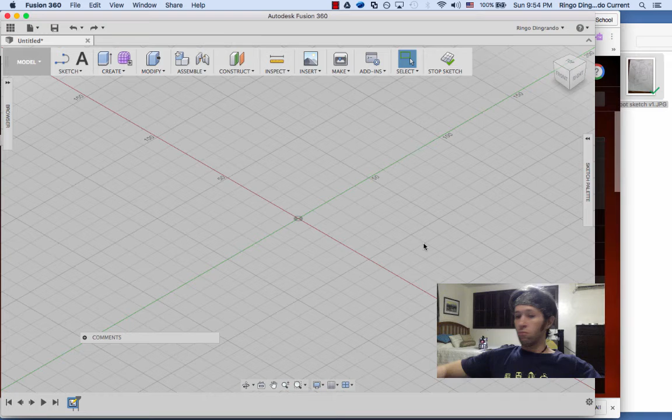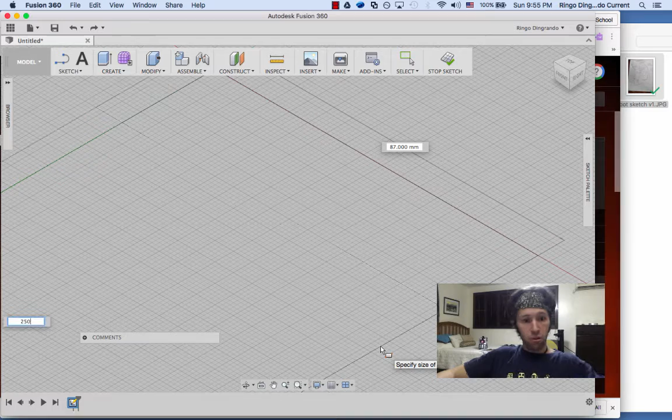Now if you are making the housing joint stool, I think it's easier to design this one upside down. So I'm going to put the top of the stool on bottom. So I'm going to hit R and draw on the bottom horizontal plane, and I'm going to zoom out actually, and I'm going to make it 250 mil by 350 mil. Return. I'm going to zoom out more, drag this into the middle.

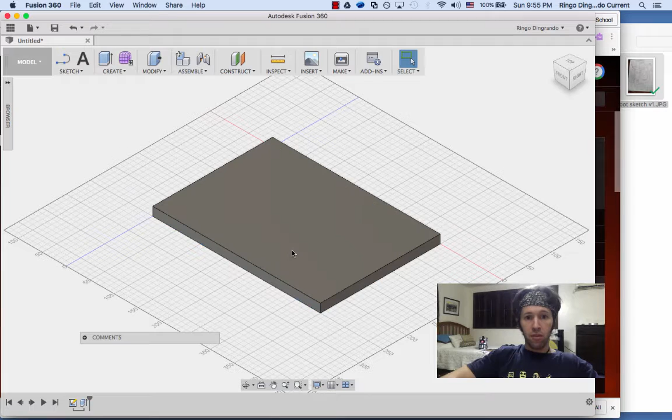I'm going to hit Q for pressing and pulling. I'm going to select that and make that 18 mil. So I'm going to use 18 mil birch plywood. And that's the bottom of my stool. That's actually the top of your stool. Yours should be way more interesting. I'm just going to leave it as a rectangle for simplicity.

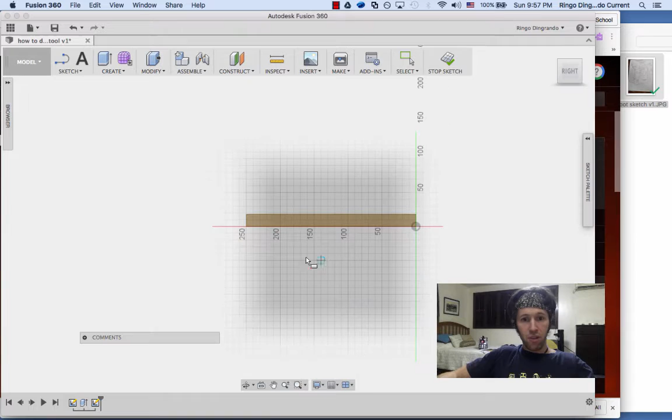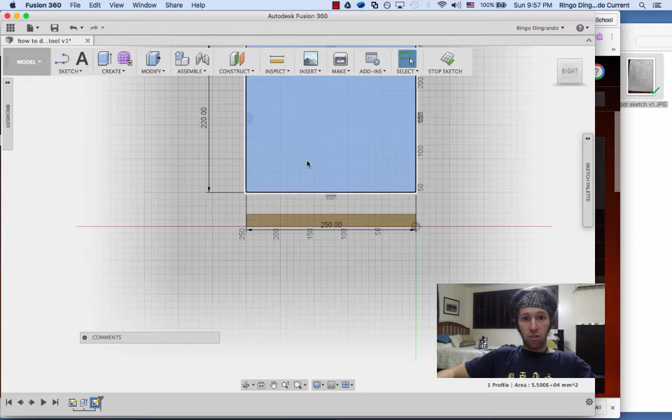Now the next thing is we want to draw one of the legs. So I'm going to make another R for rectangle. I'm going to draw it based off of this face. I'm not going to connect it to it though. I'm going to draw it starting here, and I'm going to give it a height of maybe 220. And a width, I'll tab over to 250. And hit return. And I want to make this depth of 18. So I hit Q and 18 and that.

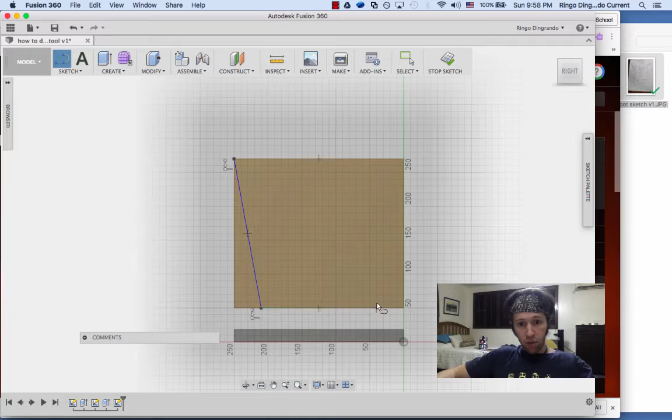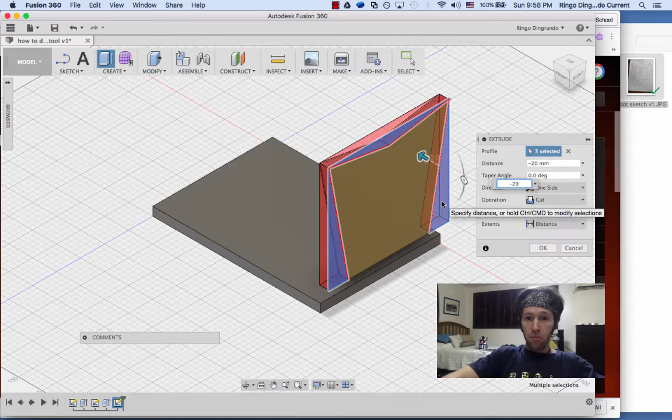Now I want to give it a shape. I'm going to go a very basic shape. Yours should be more interesting. I'm going to click that. I'm going to hit L for line, and I'm going to take that down to there. Take another line to there. I'll cut into the middle a little bit, and I'll make those. And I'm going to use Q to push those sections out all at once, and I can put in, let's say, negative 20, and that pushes them out.

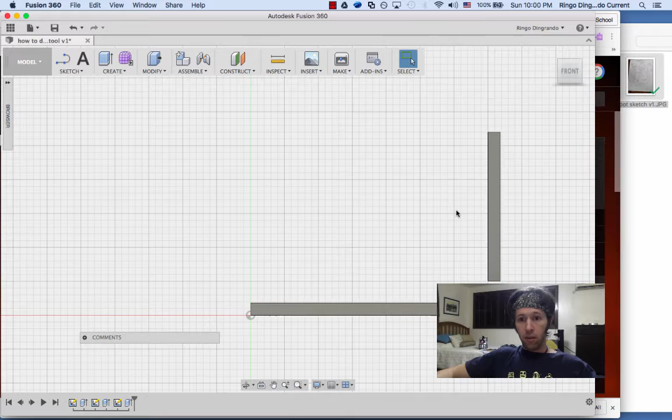Got one leg, I want to make two legs. So I want to look just at this right side and drag this down. Maybe I'll look at, this is probably better. And I'm going to highlight just this part, and I'm going to copy. Then I can right click and I can paste. And now it looks like there's not a second one, but there is. It's just right on top of it. So I can move this second one by sliding the arrows.

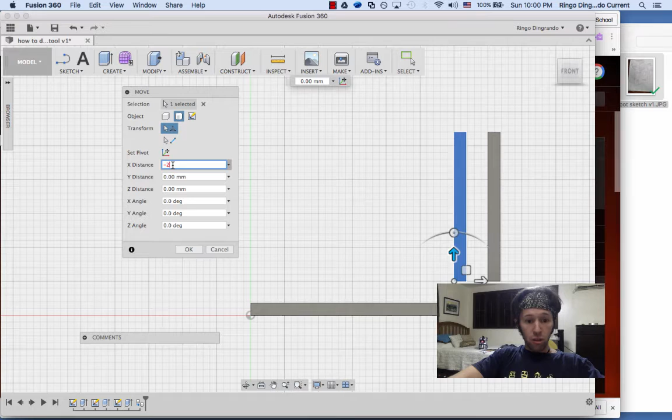It's maybe best to just put in the distance. Let's say I want to make it go minus 50. And that is the right way, but I want it to go more than 50. I want it to go maybe minus 250. And that moves all the way over there. So I'm going to spend some time getting these put in exactly the positions I want based on changing these variables here. Now I've eventually moved them so they go down into the top of the stool a little bit, and that helps make them all one. You don't want floating pieces if you're going to 3D print a model, which we are.

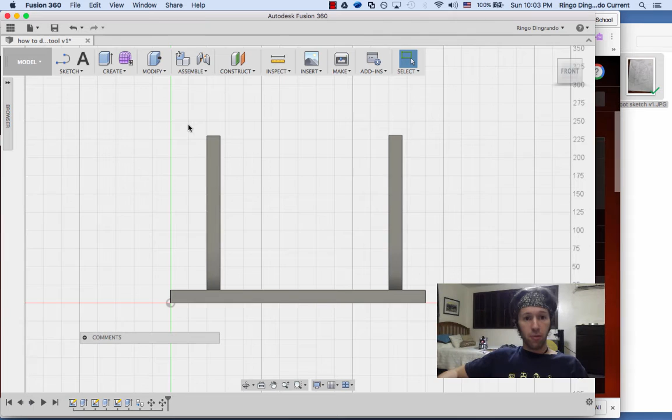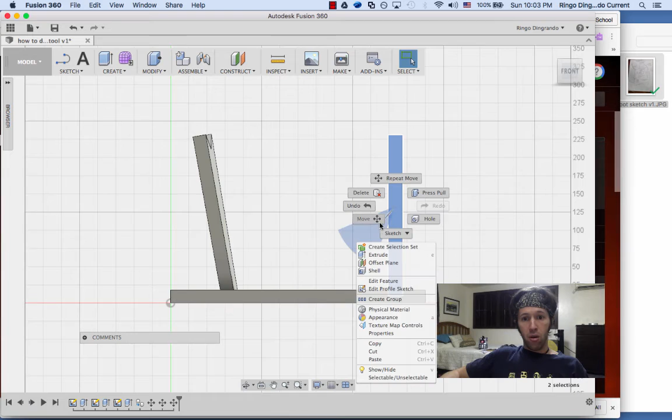So now I want to rotate them a little bit. So I'm going to highlight this guy. I'm going to go to the move function again. I'm going to try and see which angle, maybe I can just use this one, and rotate it 10 degrees that way. And that's okay. I'm going to highlight this one and move that. I'm going to rotate this one 10 degrees that way. Now this one on the left, I don't know why that changed a little bit, and I can see part of another face. I don't know why it does that, but it turns out to not be that big of a deal. And now it's looking pretty good.

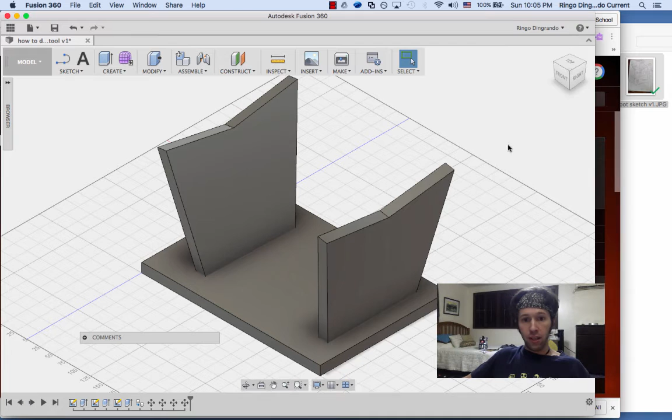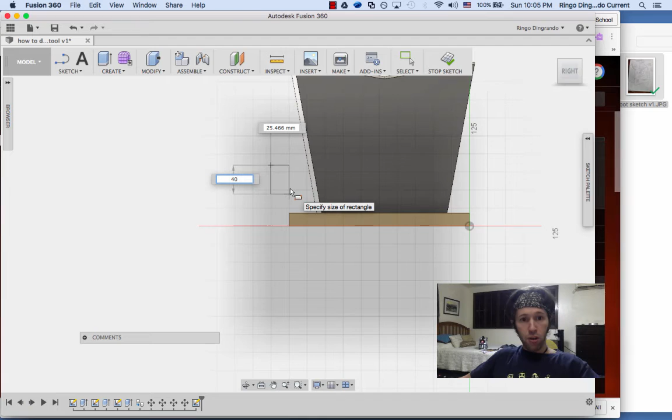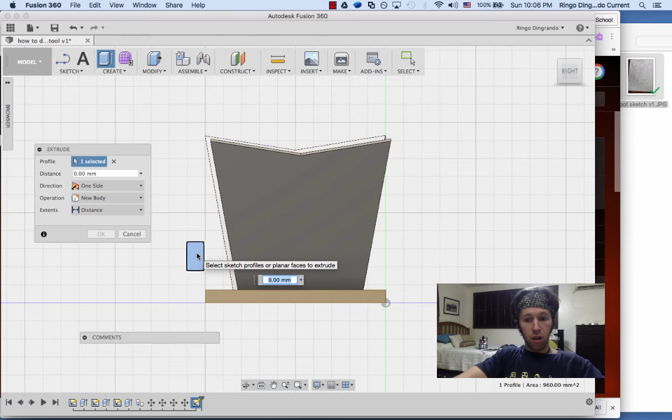Now I want to make braces that can serve as the housing joint to lend support to the legs. And so I'm going to look at this viewpoint and click on this face, and I'm going to make a rectangle floating up above here a little bit, and I'm going to draw it in the air first. And so I'm going to make it maybe 40 millimeters, and I'm going to use a thickness of wood that is not 18. I'm going with a thicker 24, and hit OK, and I'm gonna use Q to pull that to a distance, let's try 300 and see how that looks.

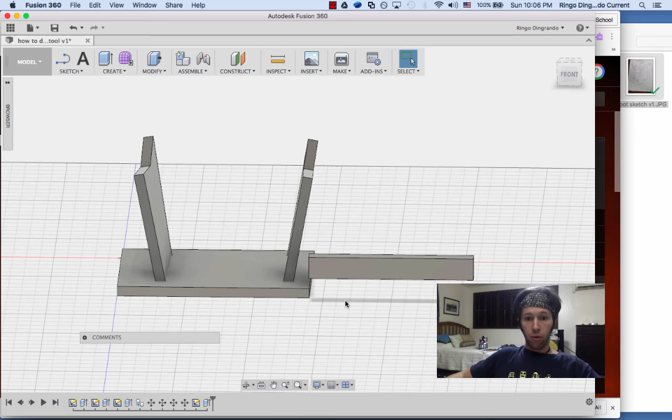So at home, I've got this piece, which I think, okay, that's a good size. So let me highlight it and, oops, highlight only that piece. And I'm gonna copy it, and then I will paste it, and it pastes it right on top of it. But I can move, if I change the viewpoint, I can move this other one over to here, and now I've got my two braces. You can then rotate them and move them into just the right place. That can be a very tedious thing, but it will be worth it for making your design good. So that's it.